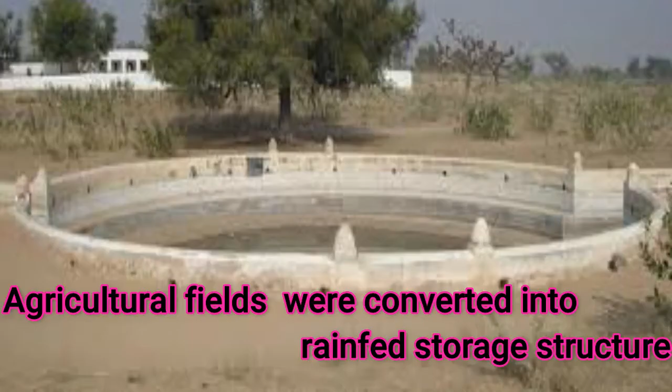Number 1, Khadins and Johads. In arid and semi-arid regions, agricultural fields were converted into rain-fed storage structures that allowed the water to stand and moisten the soil, like the Khadins in Jaisalmer and Johads in other parts of Rajasthan. Number 2, in the floodplains of Bengal, inundation channels are constructed. People have developed these inundation channels so that they can irrigate their fields with the flood water.

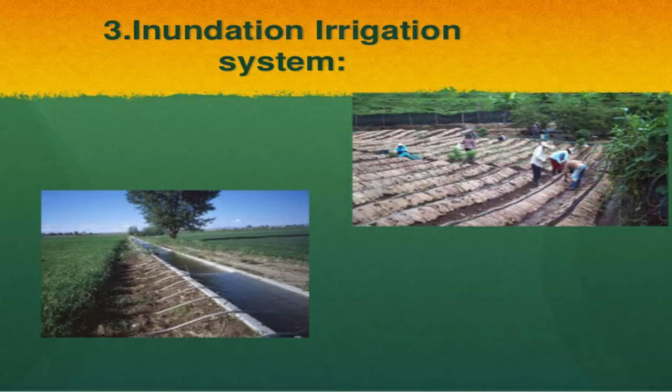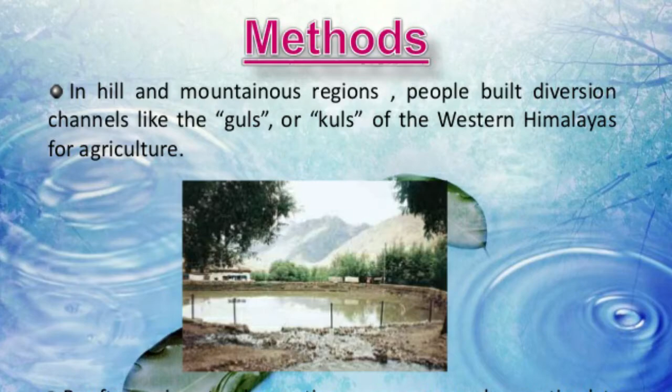Number 3, Guls or Kuls. In the hilly and mountainous regions, people built diversion channels so that they can collect rainwater and spring water and store it in circular tanks like the Guls or Kuls. We can notice the Guls and Kuls in Himachal Pradesh, where the water is used for agriculture.

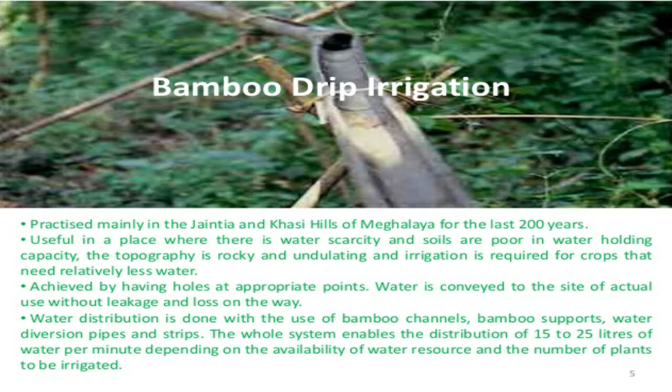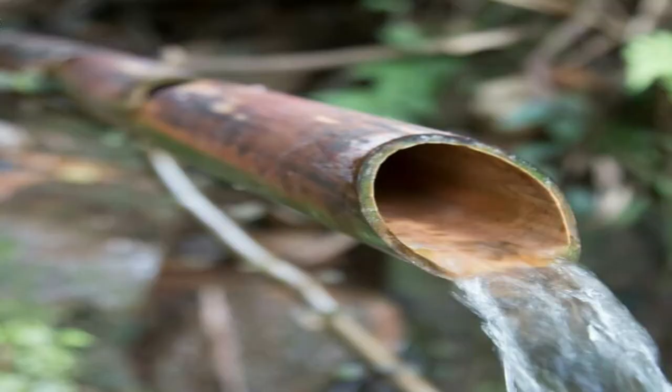Number 4, bamboo drip irrigation. This system has been in practice for 200 years in Meghalaya. In this system, water from streams and springs in the hills gets transported to agricultural fields by using bamboo as pipes. Number 5, rooftop rainwater harvesting.

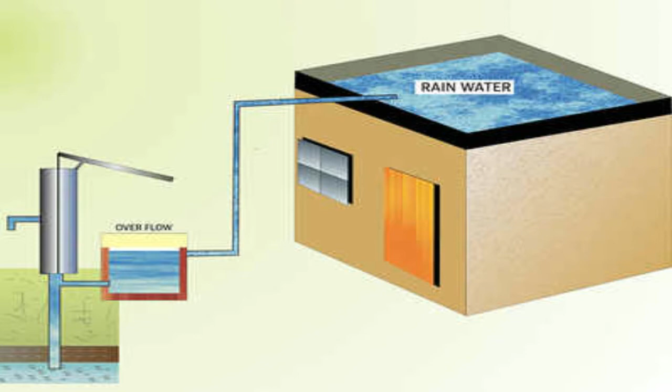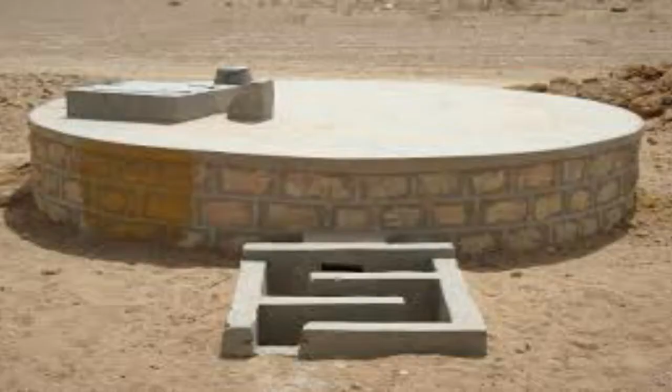People living in arid and semi-arid regions of Rajasthan and Gujarat, where rainfall is scanty, have found ways to store rainwater falling on rooftops. Particularly in Bikaner, Phalodi and Barmer in Rajasthan, almost all the houses traditionally had underground tanks or tankas to store rainwater that can be used for drinking and to irrigate the agricultural fields.

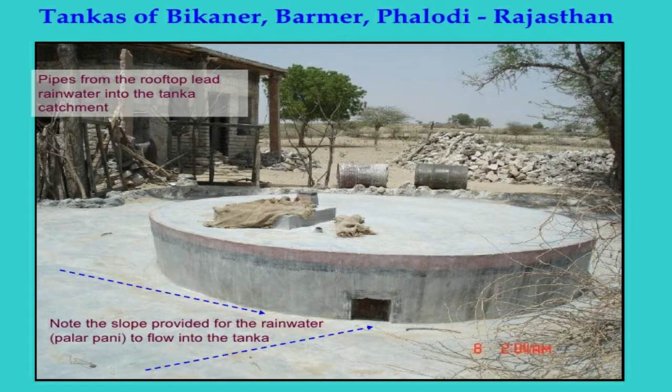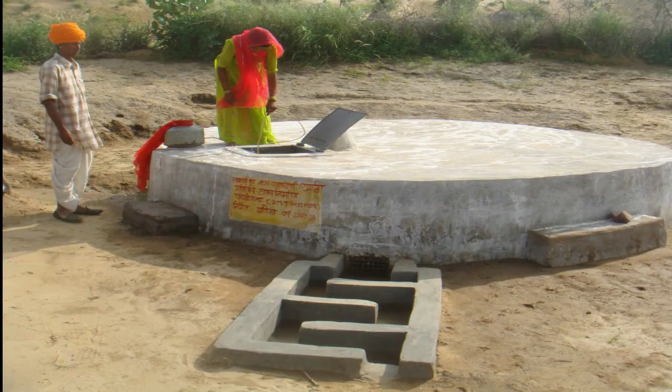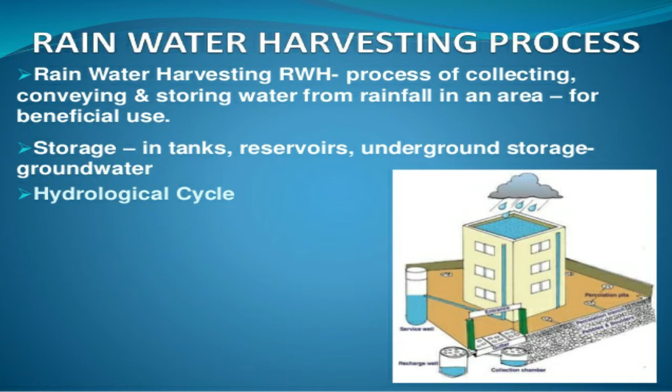The tanks could be as large as a big room. Like in Phalodi, one household had a tank that was 6.1 meters deep, 4.27 meters long and 2.44 meters wide. Tankas were part of the well-developed rooftop rainwater harvesting system and were built inside the main house or the courtyard. Now let us know the procedure for rooftop rainwater harvesting.

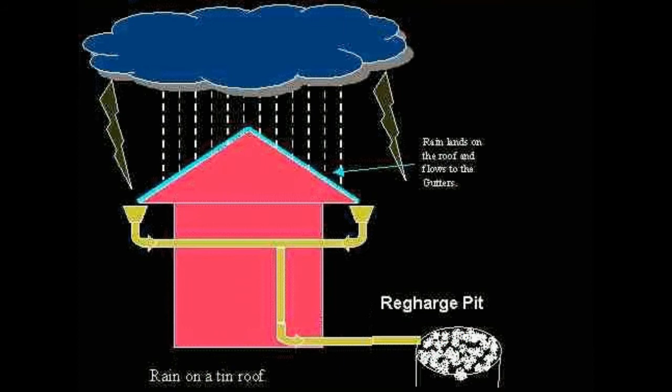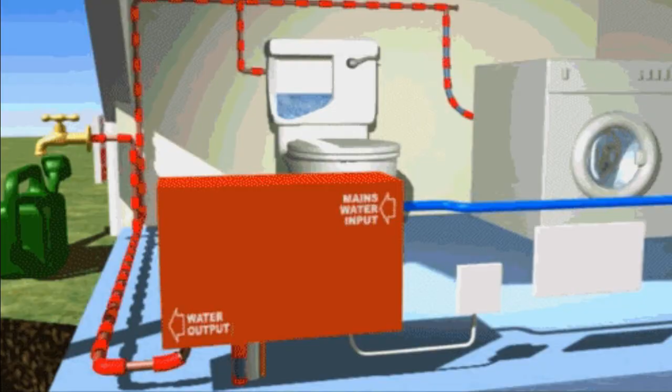The tanks were connected to the sloping roofs of the houses through a pipe. The rainwater falling on the roof is collected using a PVC pipe and filtered using sand and bricks before being taken underground to a sump or tank for immediate use. The sump has an overflow pipe which allows the excess water to overflow.

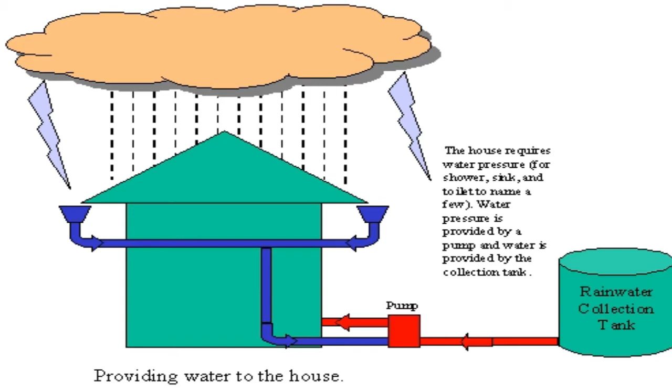Now the excess water from the sump is then transferred to a well which recharges the groundwater. Any further requirement of water can be taken from the well. Sometimes we will also see that a hand pump is attached to the pump that connects the sump. Then the recharge is done through hand pump.

Usually the first spell of rain is not collected, as this would clean the roofs and pipes. Rainwater from subsequent showers was then collected and stored in the tanks. Rainwater, also known as Palar Pani in these regions, is considered the purest form of natural water. It is an extremely reliable source of drinking water, mainly in summers.

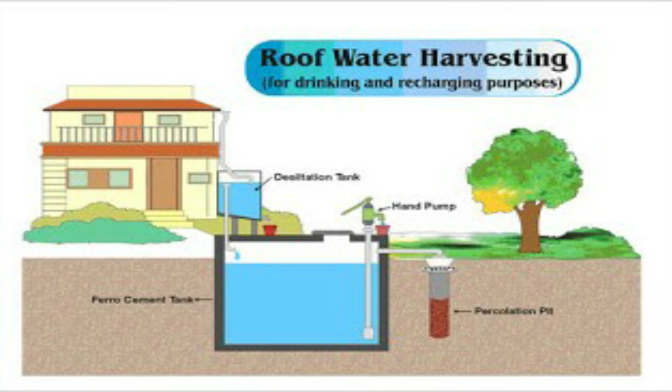In fact, we will see that in many houses, they have constructed underground rooms adjoining the tankas to beat the summer heat, as it would keep the room cool. But sadly, in western Rajasthan, due to the perennial Indira Gandhi Canal, rooftop rainwater harvesting is on the decline, as plenty of water is available. This traditional method of rooftop rainwater harvesting is becoming very popular in India. Now let us see how the modern adaptations of this traditional method are being carried out.

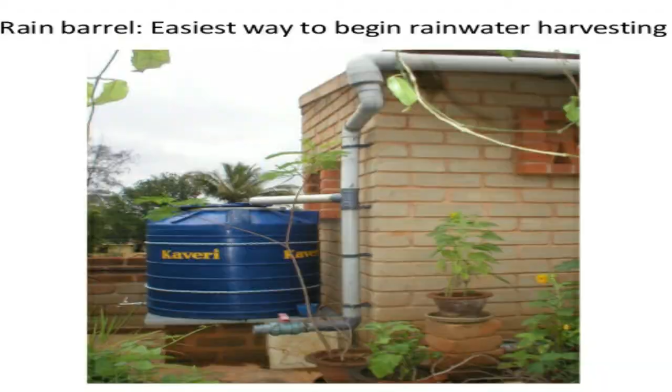In Shillong, Meghalaya, rooftop rainwater harvesting is a common practice. Cherrapunji and Mawsynram, which receive the highest amount of rainfall, are situated at a distance of 55 km from Shillong. Still, the capital city of Meghalaya, Shillong, faces an acute shortage of water supply. Now, nearly every household in the city has a rooftop rainwater harvesting structure. Around 15 to 25% of the total water requirement of the household comes from rooftop rainwater harvesting.

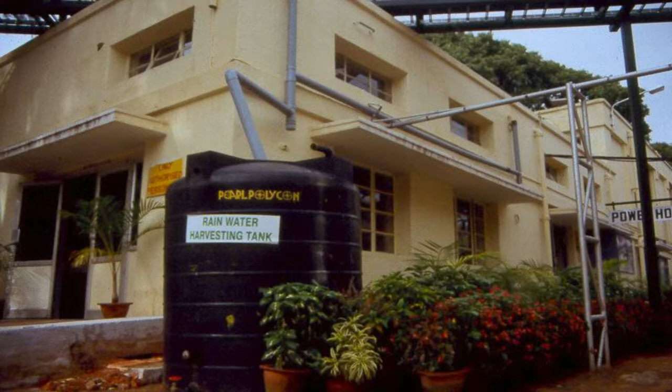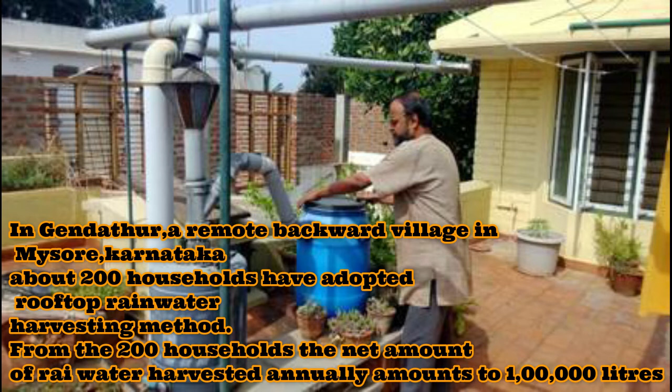In Gendathur, a remote backward village of Mysore, Karnataka, about 200 households have adopted the rooftop rainwater harvesting method. And with the adoption of rooftop rainwater harvesting, the village has earned the rare distinction of being rich in rainwater. From the 200 households, the amount of rainwater harvested annually amounts to 1 lakh liters.

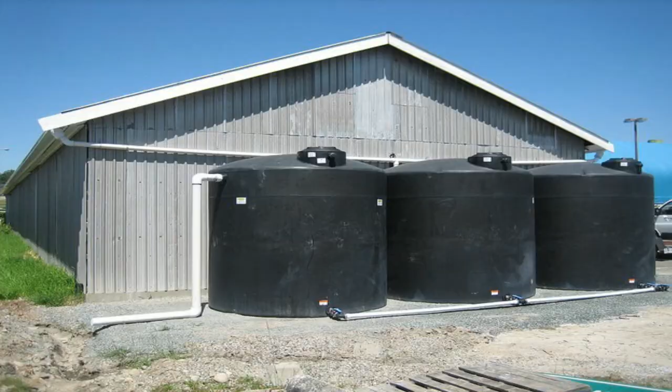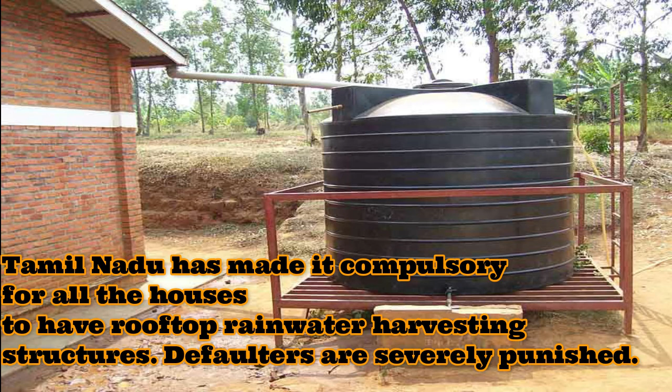The state of Tamil Nadu has made it compulsory for all the houses to have rooftop rainwater harvesting structures. Any houses where the rooftop rainwater harvesting structures are not constructed are regarded as defaulters, and the defaulters are severely punished. So we can all understand how important it is for all of us to think of ways by which we can conserve the water resources.

We need to understand that water scarcity is becoming a major global concern day by day. It is very important for all of us to think of viable alternative ways by which we can conserve the water resources. As we have seen, our government has initiated the multi-purpose river project, which will lead development and also help to control floods and conserve the water resources. There are other means like the rainwater harvesting system by which we also try to conserve the water resources.

We all know that the available amount of fresh water is very limited, and most of the water that exists in oceans is not fit for human use. So it is very important to conserve the water resources for the future generation. Hope all of you understood. Today we discussed rainwater harvesting, the traditional methods of rainwater harvesting, the procedure of rooftop rainwater harvesting, and the modern adaptations of the traditional method of rainwater harvesting.